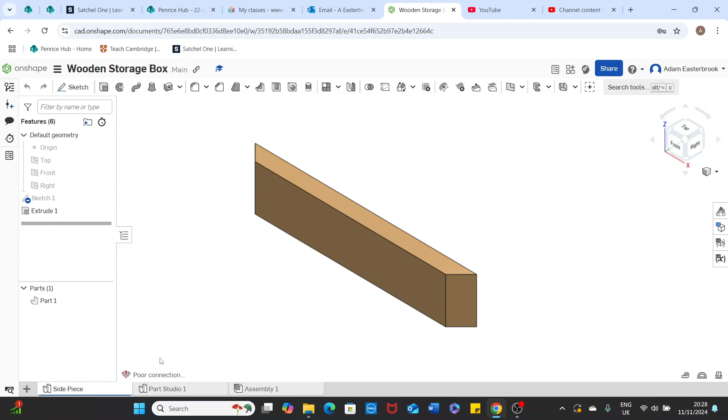So I want to create a new part studio by clicking on the plus sign, create part studio. I'm going to right click on that and rename it. I'm going to call this the end piece. We've got the side piece and the end piece.

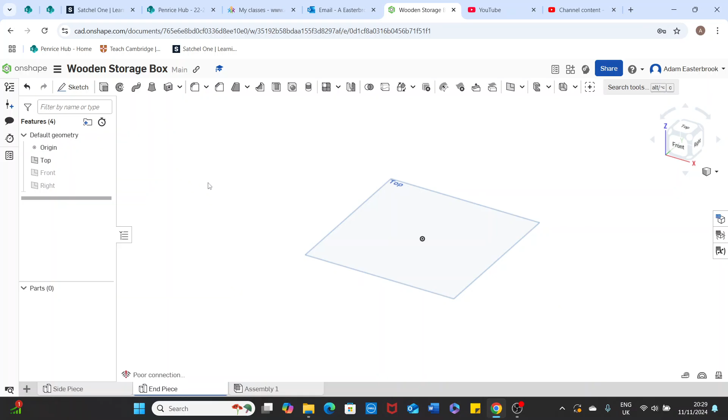As before, we can use the top plane, so I'm going to hide the front plane and hide the right plane. Otherwise it can be a bit messy and make our lives more difficult. It needs to be a very similar process to what we did before, but the dimensions need to be a bit different because it's a bit smaller.

So I'm going to sketch, and it's saying, great sir, you want to do a sketch? Well what plane? These blue boxes are always these questions. They're asking you something before it can do anything more. It's saying, sir, tell me which plane do you want to sketch on?

And you'll notice my toolbar's all grayed out. I can't choose anything up here. That's because it wants me to tell it which plane or which face do I want to sketch on. So we're going to choose top plane.

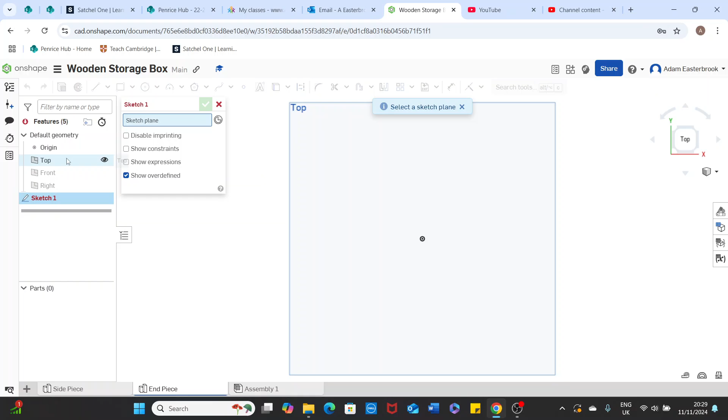Now my toolbar at the top comes alive, and again I'm going to choose a corner rectangle. Left click on my mouse, make a rectangle shape, and then we'll use the dimensions to get it to the right sizes. So left click again.

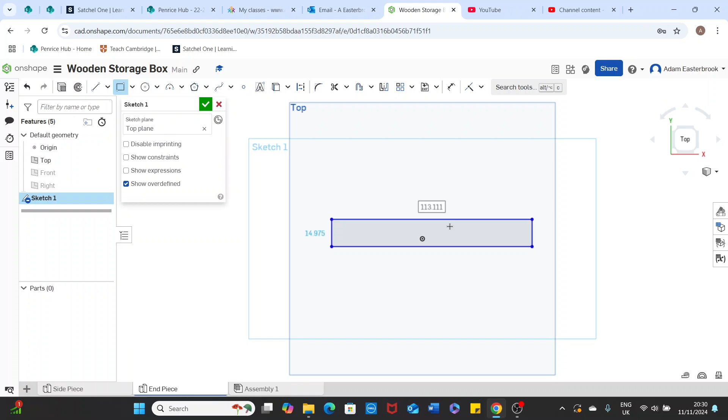Don't fall into the habit of trying to click on this white box, because you'll start to draw another corner rectangle. You only want one. Because it's gone white, it's gone white. I'll show you - I've only clicked with my mouse once there and there. I haven't clicked again. If I move my mouse over here, that's highlighting the box. Move my mouse back there, I'm highlighting that box. I haven't clicked. No clicking is taking place.

So I'm going to move my mouse back over here towards this box. It goes white, which means I can now put some dimensions in it. This dimension is going to be 80 millimeters. Press enter, this dimension on the side here.

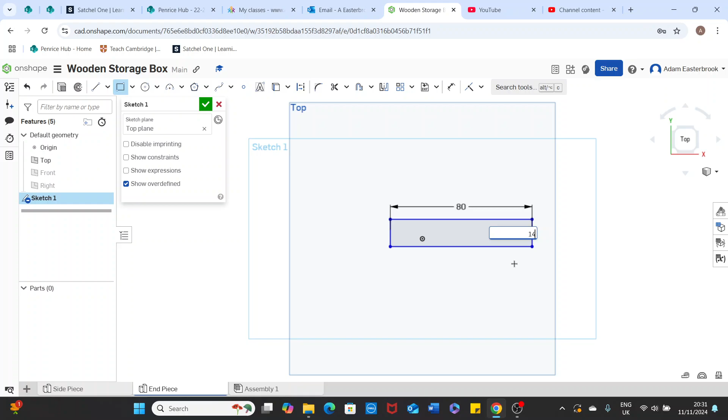So again, don't click on that white box because it will think you want to draw another rectangle. I don't, because it's gone white it means I can just type my dimensions straight in. We're going to use 14mm thick plywood, so that's the thickness of my plywood, 14 millimeters.

I don't like having dimensions on my sketches, so I'm actually going to go up here and click the dimensions tool. I'm going to click once, hold down and drag this dimension off my sketch to clean it up.

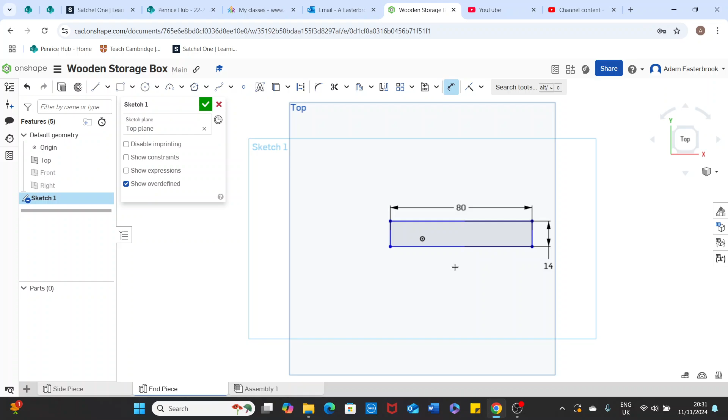I'm not going to use the dimensions tool just yet, so I'm going to go back over to my line. And I'm going to zoom in for you so you can see exactly what I'm doing. I'm going on the top left of my rectangle there.

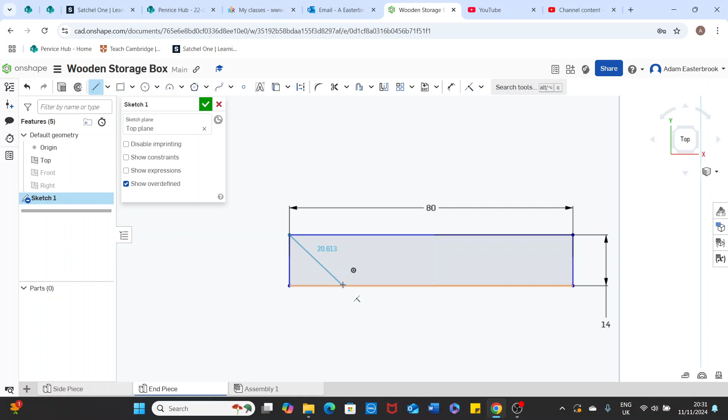I'm going to bring a line. I'm going to click, bring a line down. Wait till that line at the orange bottom goes orange so I know it's constrained. Constrained means fixing it in place.

Okay, Onshape thinks I still want to draw lines. I don't, so I'm going to right click. I'm going to click escape line.

Choose my line again, top right corner of my rectangle. Bring it down to the bottom line here. Wait for it to go orange and click. Onshape thinks I want to keep drawing lines. I don't - don't go clicky, clicky, clicky, because you'll just start drawing lines all over your screen and get frustrated and a little bit lost. Right click, escape line.

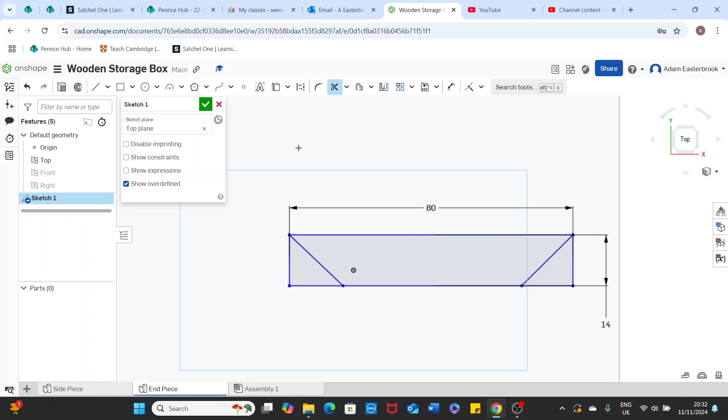I'm going to use my trim tool, like a pair of scissors, like I'm trimming something. Click on my trim tool, click on that line, remove that line. Click on that line, remove that line. Do the same over this side, click on that line and remove that line. There is my end piece.

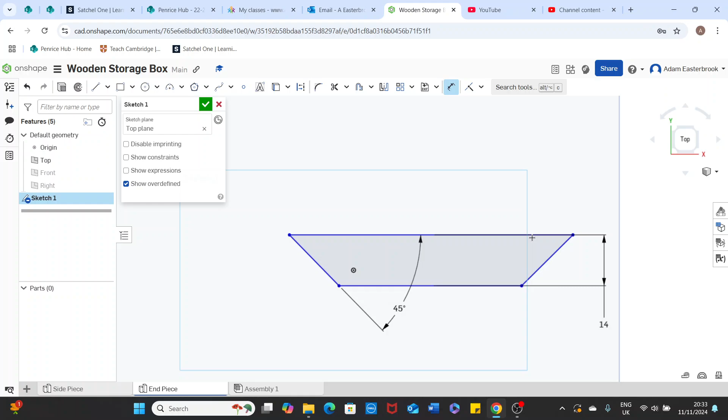I need to use my dimensions tool, and I need to make sure that this angle is set to 45 degrees, and I want to do the same over here because we're creating a miter joint, and we know that miter joints are where two pieces meet, running at a 45-degree angle.

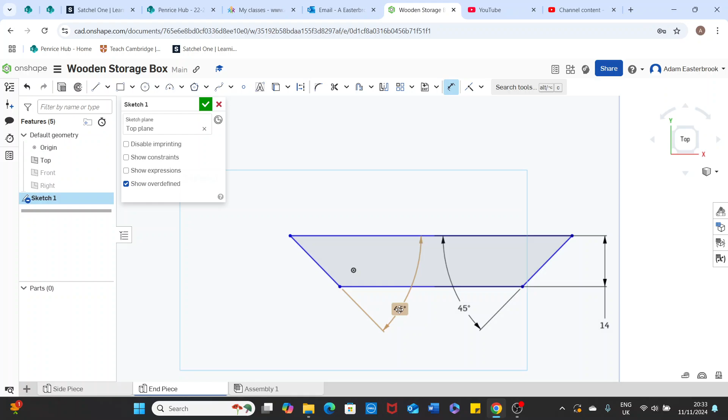Again, you'll see I've got my dimensions off my sketch. Get into the habit of making sure your dimensions are off of the sketch. It cleans it up and stops it becoming messy. Happy with that? That's what I need to do - green tick.

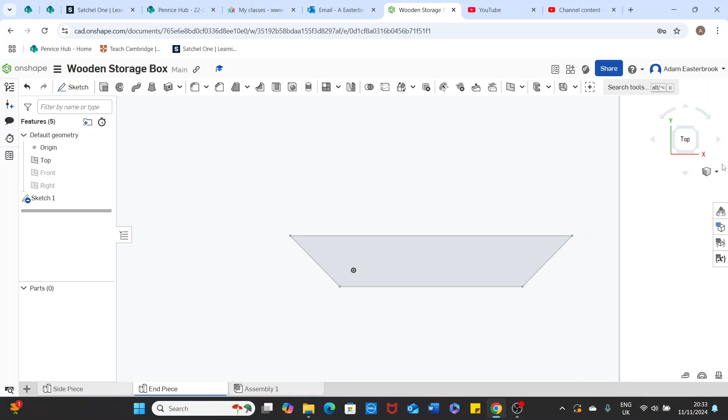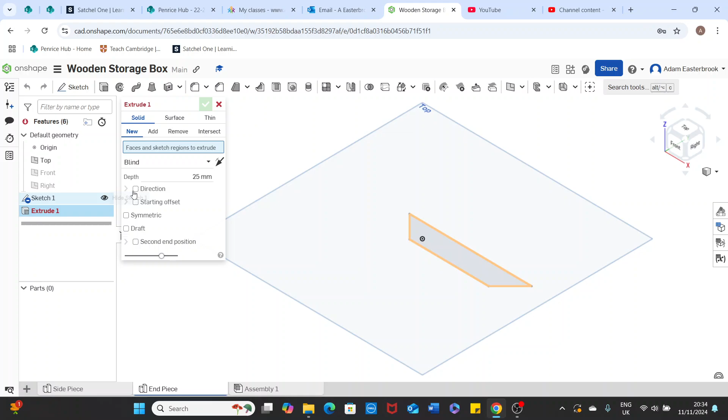Great, you want to extrude, but what do you want to extrude? What sketch or what face do you want to extrude? I want to extrude the sketch that we have just completed, which is sketch 1. I could click here - this time I'm going to click on the sketch, just to show you can click in a couple of places. Remember, I can toggle down or up.

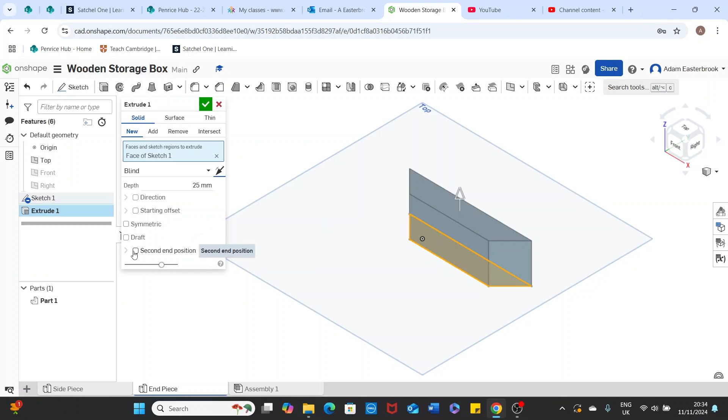It doesn't make a difference in this situation, what we're designing, but it might do in future lessons. So what we're actually going to do is a symmetrical extrude, so it extrudes half up, half down, and we're going to change the depth to 40 millimeters. That's going to be the height of our material, our pine wood. I'm happy with that - I'm going to green tick it to complete that.

I don't like this plasticine blue, as it's not as realistic as we can get it. I've said before, the rendering options in Onshape aren't great. If you're using things like Tinkercad or other CAD pieces of software, you can actually make it look specifically like a piece of wood, really realistic. But we don't have that option with Onshape, the program we're using, unfortunately, so we have to be a bit creative.

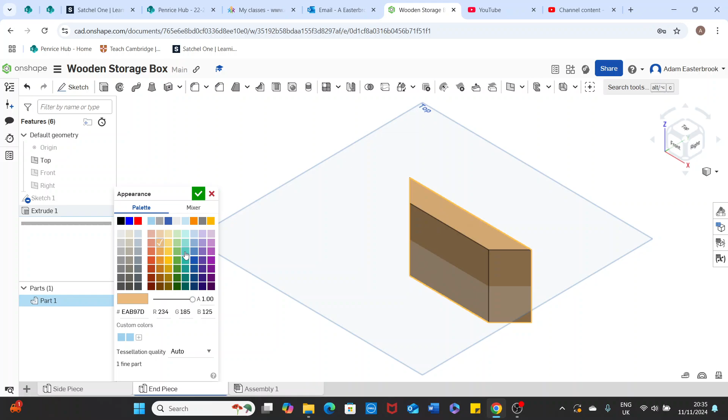So I'm going to right click on my mouse where it says part 1, which is that side end piece I've just created. And I'm going to go to the 4th from the top, which is edit appearance. I'm going to choose a browny color to make it look as wood-like as I can possibly make it. Green tick.

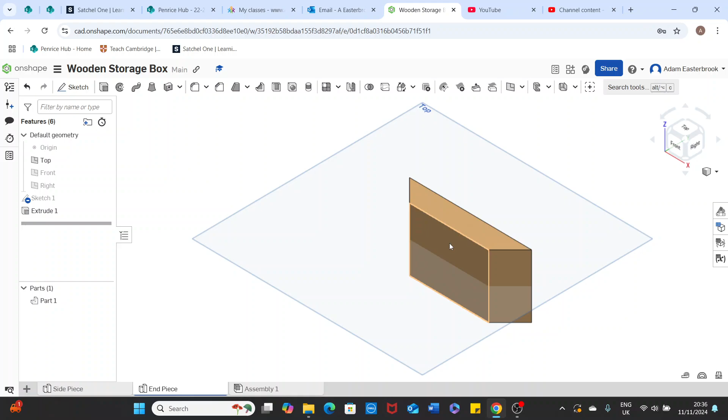Okay, so that's my side piece there, and that's my end piece. We're now going to move on to doing the lids - they'll do the top and the bottom. So I will do another video for you to follow along to complete that. Good luck.